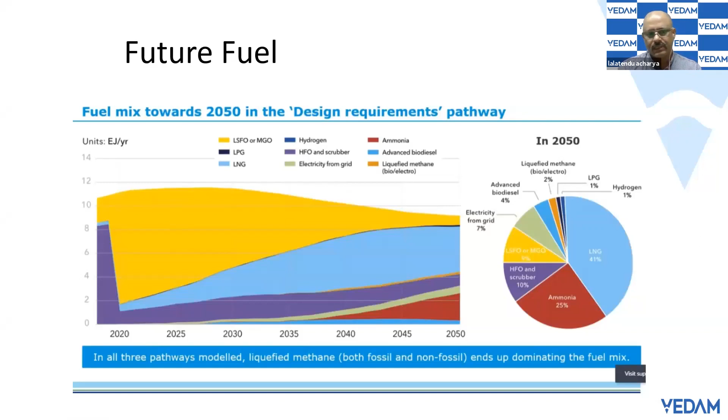So it is natural that, marine transport being a major contributor of air pollutants, LNG is going to come in a big way as a low carbon fuel in future, till we find a completely zero carbon fuel at some point in future. So for the immediate and medium term future, LNG will be considered as a marine fuel for days to come.

So now coming back to why we have considered LNG for coastal ships. Coastal vessels have a very typical requirement. It is almost like a liner service, and most of the cargo owners are ship owners. And going forward on the Indian coast, in the next 3 to 7 years, there's a good possibility that bunkering and supply chain for LNG is going to come in a big way. So taking all those things and the environmental and pollution aspects into consideration, we foresee a possibility of a lot of activity towards LNG fueled vessels, or rather dual fuel vessels, on the Indian coast.

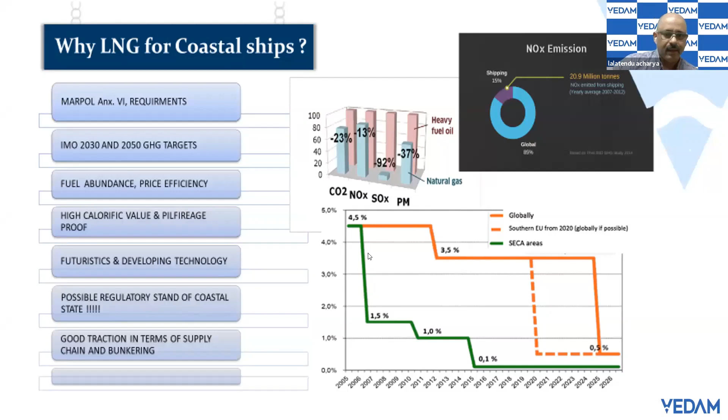Now going to the next slide, we discuss what the challenges are. We have divided the challenges into 4 categories. The first is design and structure related. The second is fuel and combustion related. The third is environmental safety, and the fourth is cost related.

Now discussing design and structure: it being a cryogenic fluid, considering a coastal vessel, it will be stored in a type C tank. So the tank location, the storage volume, and the supporting structure play a big role. Why storage volume? Because with coastal vessels we are talking of short voyages and the possibility of a frequent bunkering facility available.

So in that case, storage volume plays a big role, because the ratio of a conventional HFO storage space for a particular engine size to an equivalent LNG fueled engine is around 1:3, which means in the case of LNG, you will be losing almost 200% more in terms of volume. Now, the size of the tank plays a big role here. So through our iteration process and design, we understand how we can minimize the storage volume.

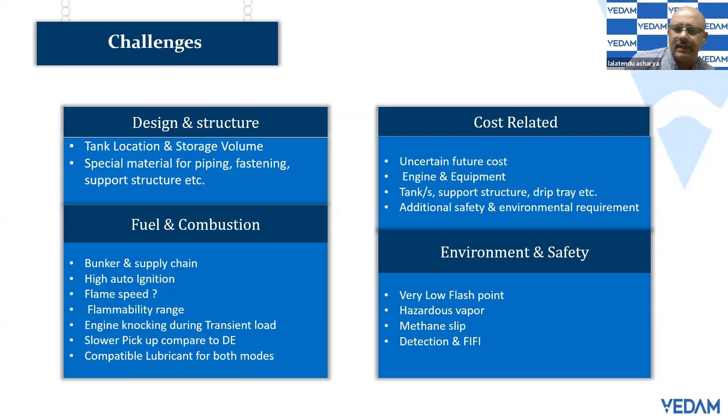Then I discuss about environmental and safety. Yes, this particular LNG fuel has a very low flash point, so handling the hydrocarbon vapor is a big challenge. So the hazardous area, the hazardous concept, or the hazardous vapor presence poses a big challenge as far as fire safety is concerned.

Then we have an issue called methane slip, and here we are discussing 4-stroke dual fuel engines in this particular presentation. So when low pressure methane or natural gas is admitted inside the combustion chamber of the engine, there's a possibility at low load or low speed that part of this gas doesn't achieve the required combustion level. So that gas slips through the exhaust lines into the atmosphere, which is normally called methane slip.

And methane being a GHG gas, that is still a big concern. And many of the engine builders and equipment suppliers are working on this particular aspect to improve and minimize the possibility of methane slip. Then, of course, we come back to fire detection and firefighting, which require extra care because of this presence of hazardous vapor. Now, all these additional safety and additional structural requirements will have a cost implication.

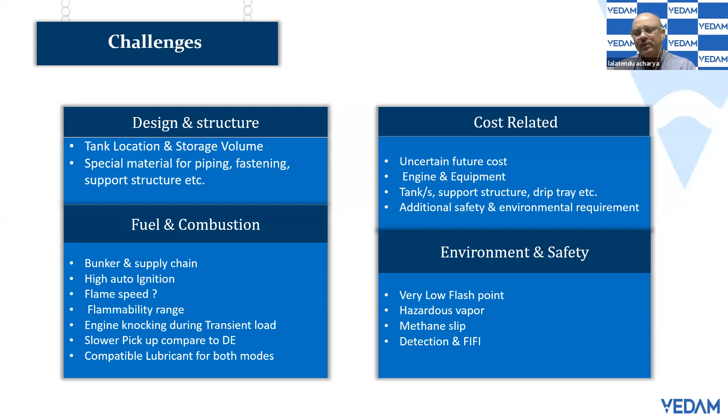And as far as the fuel cost is concerned, yes, it is a dynamic situation right now. We are not very sure about the fuel cost after 2, 3, 4 years, both in terms of LNG fuel cost as well as normal conventional fossil fuel of IFO, HFO, LSHFO, and diesel oil, MGO or MDO. Similarly, engine and equipment. At this point of time there is a cost factor available, but what happens after 3 years, 5 years? What is the demand and supply? What will be the cost? Those things have to be taken into consideration.

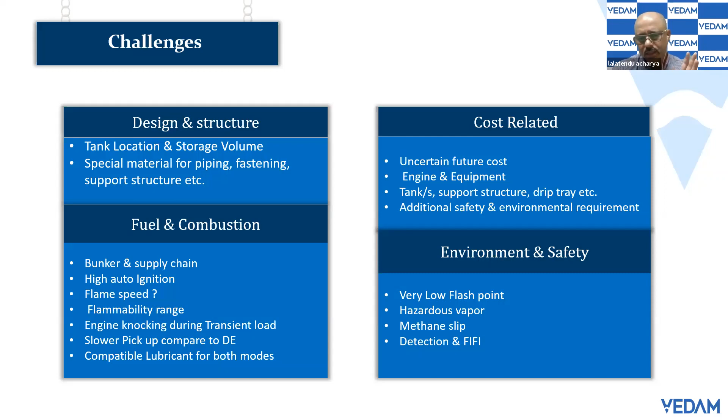We require special material for tank support, structure, piping, ducting, insulation, drip tray, which is costly material. So this will pose additional cost as far as the design and construction of these vessels are concerned. Then, of course, additional safety and environmental requirements.

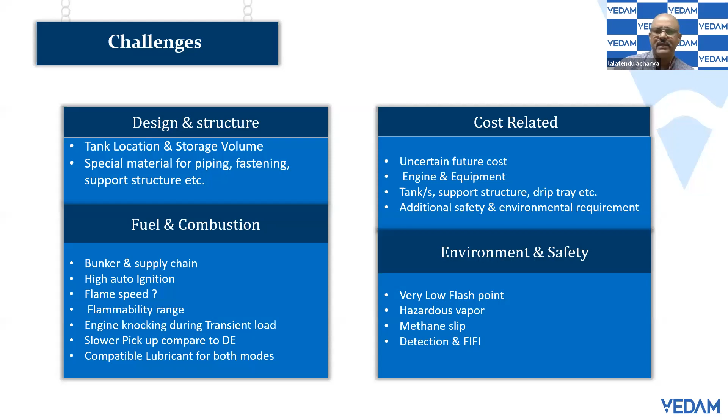So this is a slide where we are discussing the IGF code, which basically deals with low flash point gas fuel. The complete functional requirements of all the appliances and their arrangements have been discussed in this IGF code, and the IGF code has come into force since 1st January 2017. As you could see, chapter 1 to chapter 15 talks about various aspects of the equipment, structure, installation arrangement.

Then part A2 talks about ethyl and methyl alcohol, which is not of our concern as far as this particular presentation is concerned. Then part B and part C talk about manufacturing, workmanship, testing, and part C, also chapter 17, talks about operational requirements and training. The interesting part of this particular code is we can consider it a new age regulation, which is basically based on risk assessment and is goal based.

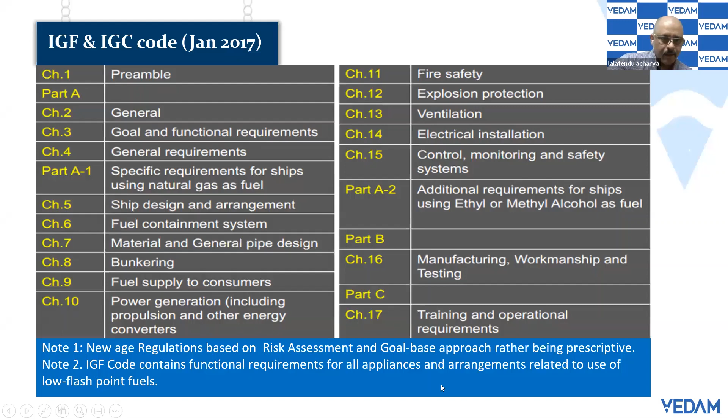And coincidentally, our design for a coastal vessel also involves a goal-based approach, a risk assessment and risk mitigation methodology. So the next slide will be discussing those aspects. As you could see, the biggest challenge for an LNG fueled vessel over a conventional IFO or MDO fueled vessel is the storage space, the tank volume, the handling of cryogenic and hazardous fluid, additional ventilation, safety, firefighting requirements, and the location and the loss of cargo volume because of these LNG tanks.

Now, the reference vessel we have taken into consideration while discussing these LNG-fuelled coastal vessels could be a bulk carrier, tanker, or even a RoPax vessel. The DWT is between around 8,000 to 10,000 tons. Length could be anywhere between 105 or 110 meters to 125 meters.

Why are we limited to 125 meters? This is based on our knowledge of jetty size, the dry docking facilities available, and of course the principal dimensions like draft and beam. Speed, we have taken as 9 to 10 knots for our reference, for our discussion.

Not more than that. Why? Because, knowing it very well, operating a coastal vessel beyond that speed with so much fishing traffic and coastal traffic is not a feasible option. But yes, while discussing a RoPax vessel, we can consider a speed of 14 to 15 knots.

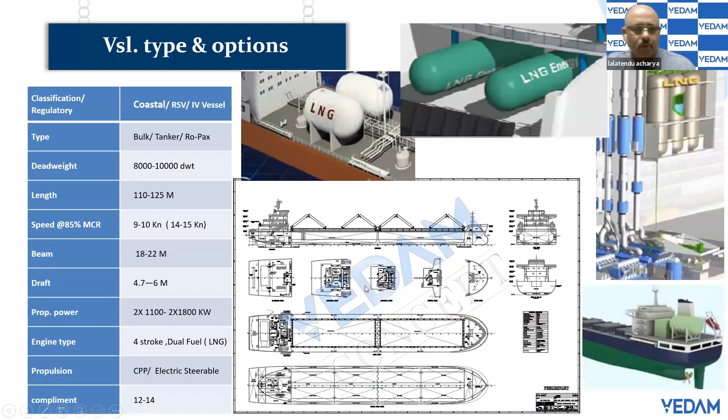Now, in the next slide, we are discussing the vessel type and the options. Now we come back to what engine and propulsion system we can have. We have not considered the fixed pitch propeller arrangement for this size of vessel. Why? Because LNG engines are inherently slower to respond, and the acceleration of the engine is relatively slow compared to a diesel engine. So a conventional FPP would pose certain operational difficulties.

That is why, after discussion with certain engine builders and taking into consideration certain designs operating in various parts of the world, we have shortlisted that a CPP arrangement will be better for a coastal vessel of this size. And why twin screw? Twin screw gives us a certain redundancy. Even if there is a problem with the gas supply system of one engine, we can still operate the second engine. And CPP also gives us the advantage of a smaller propeller, which in turn helps us operate the vessel in low UKC, lower under-keel clearance areas.

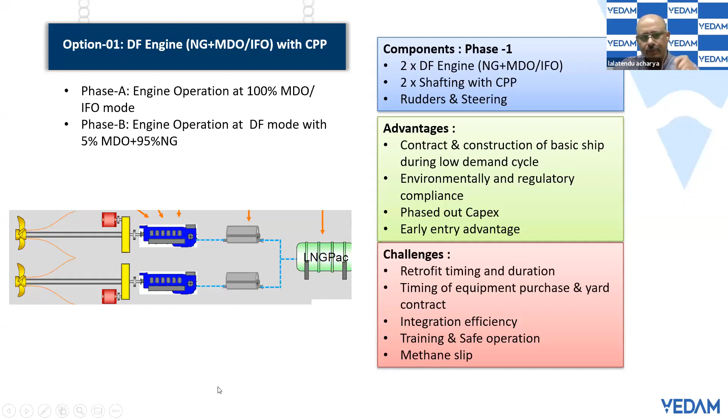So this is our proposal for option 1. Then we go to option 2. So what happens in phase 1? The DF, the dual fuel engine, the shafting system, the CPP and associated system, the IFO tanks or HFO tanks, and the tank heating, tank purification system

is designed, installed, and we leave out space for the LNG plant and the LNG system, and the vessel operates in the normal way till we reach a suitable time where the second phase can be installed, or the LNG pack or the LNG supply system can be installed on board. So that can be any time after 2 years, 3 years, 5 years, depending upon the commercial requirement or the availability of the gas.

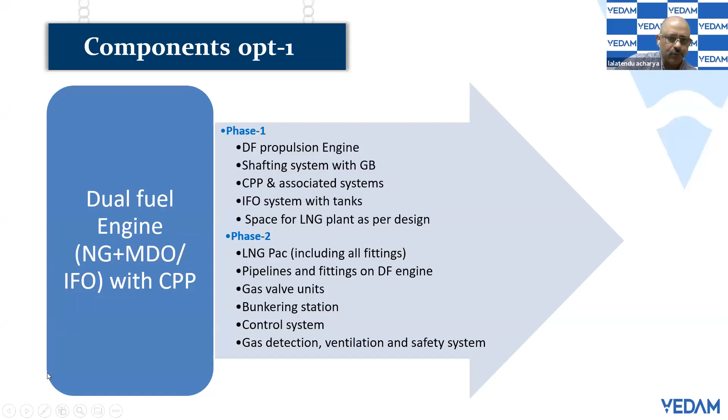So in the second phase, we put the LNG pack, the entire LNG pack system, the pipelines and fittings of the DF engine, gas valve, which constitutes the gas valve unit, bunkering station, control system, gas detection, ventilation, and safety firefighting system, which can be installed at the second phase. Similarly, for option 2, we have gone for a steerable, electrical steerable or azimuth propulsion system. This also can be replaced with a mechanical steerable propeller.

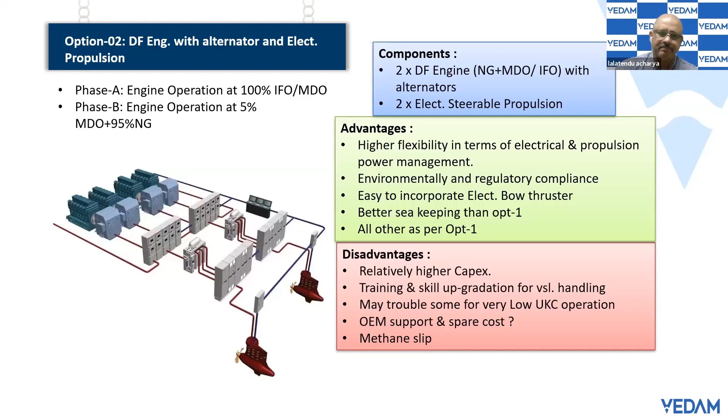Similarly, here also we go by phase 1, where the DF engine along with the alternator, switchboards, cabling, everything will be done. And in the second phase, the LNG pack, the pipelines, fitting, gas valve unit, bunkering system, control system, gas detection, ventilation, safety, and firefighting system can be installed. So the idea of suggesting this two-phase installation is to distribute the capex over a reasonable period, let's say 3 years or 5 years, depending upon the owner's financial plan or financial goal.

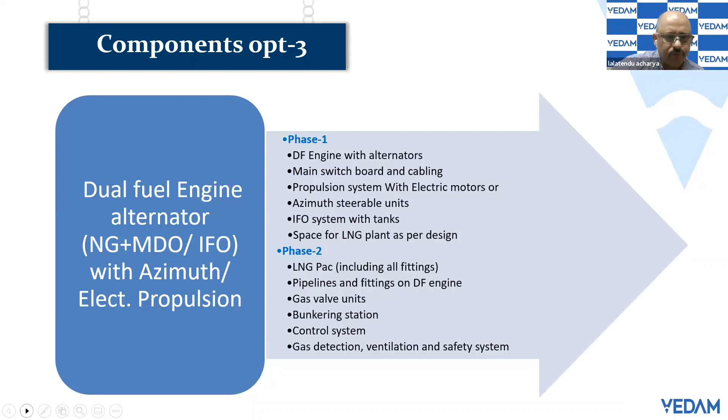And also, we feel that designing an LNG dual fuel engine vessel at this stage takes a lot of time. It could be anywhere between 12 to 16 months, since the bunkering system, the cargo system, the combustion, the engine, the technology, the equipment, everything is still further developing. And we need a lot of iteration to reach the optimum design. The process has to start very early. A period of 12 to 14 months or 16 months will probably be reasonable to design the concept or the basic design of an LNG fuel vessel.

Though the fuel supply system is not available right now in India, we are sure that while we carry out this concept design and basic design, and while the vessel is being contracted and built, by 2, 3, 4 years, the supply chain will be very much available in India. So now coming to the next slide of LNG equipment, these are certain typical LNG equipment.

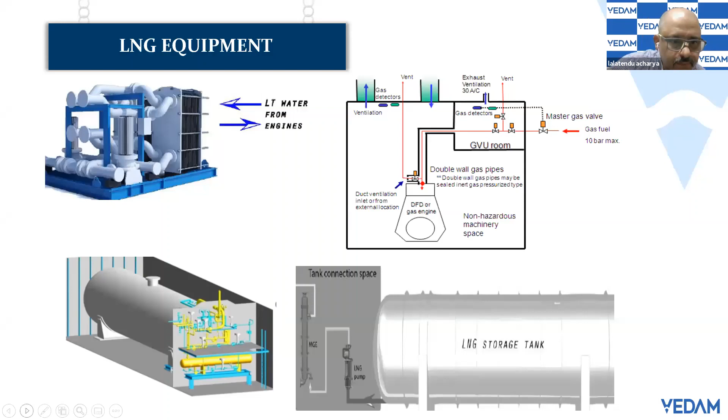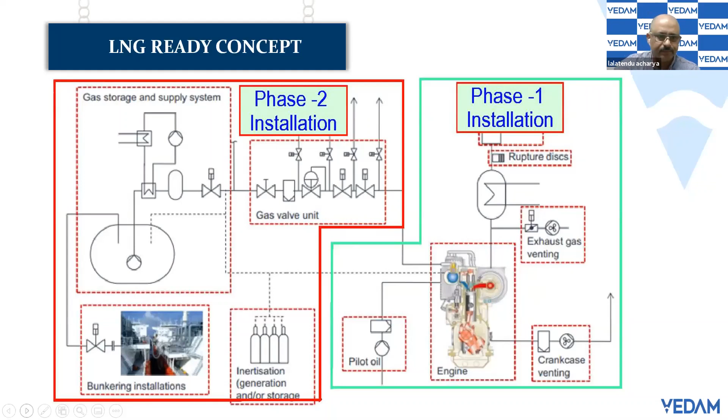And on the right hand side, which is almost like a conventional vessel, except the LNG space, which we have to design and leave out, it shows the engine, the exhaust gas venting system, the crankcase, and the pilot. The only difference is that it is a DF engine instead of a conventional IFO or diesel engine. Then we come to the strategy for this. In fact, there have already been many coastal vessels in Europe, including ferries, tugs, and smaller container vessels, already operating and converted to dual fuel engines.

We suggest here, as I said, the basic and concept design can take anywhere between 12 to 14 months because it involves rationalization of all commercial requirements, design requirements, availability of engine, yard, equipment, expertise, and integration of each and every component of the dual fuel engine and LNG supply system. So the strategy for this can be in 2 stages.

The first stage is what we call the concept level, where a concept of the dual fuel vessel is prepared, taking into account all the commercial and business requirements, the commercial goals, the business goals, the cargo it's going to transport, the cargo handling system, the draft, the jetty size; all those things have to be integrated very closely. And then we decide about the bunkering, tank capacity, engine power.

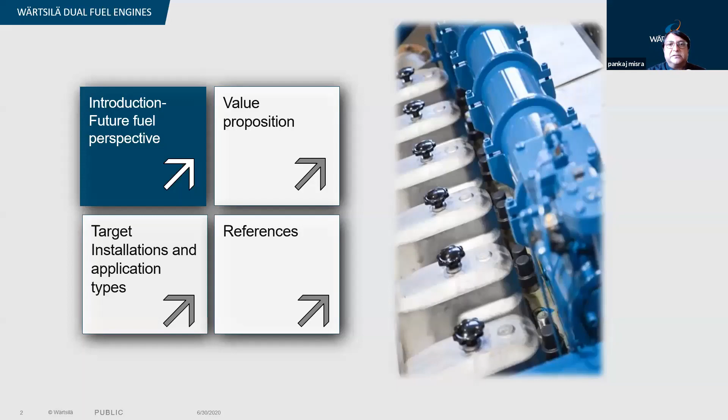As highlighted by Mr. Acharya today, the shipping industry is facing the biggest challenge of decarbonization. The ambition level set by IMO for 2030 and 2050 are quite challenging. This becomes more critical as ships being built today will be part of the fleet in 2030 and beyond, and thus will be part of the fleet emission calculations.

There are business risks that must be considered while we are looking forward to future fuels. First is the availability of the fuel. This will be restricted due to local regulations, feedstock, production capacities, and existing infrastructure. There will be increased capex and opex because the carbon neutral fuels would require existing equipment to be replaced, and are likely to be more expensive than fossil fuels, at least initially. There will be additional cost for storage, which will be added to the capex.

Then there will be an impact on vessel structures, as many of the carbon neutral fuels will have lower volumetric energy density compared to HFO and LNG, and this will require larger tanks to maintain the same vessel endurance. This will also pose increased complexity when we talk about handling cryogenic or toxic fuels, which will require more complex solutions to comply with rules and regulations. And then the last one: there will be a mismatch between the number of shipyards capable of handling the fuel conversion work and the size of the international commercial fleet.

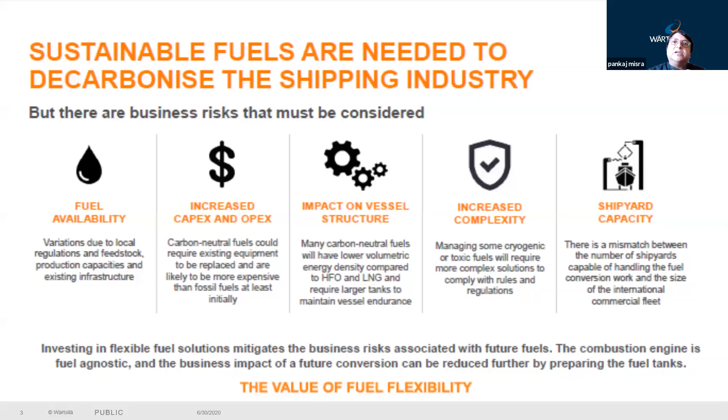Now here I have taken the diesel engine running on the diesel cycle and a dual fuel engine which is running on the Otto cycle and diesel cycle as well. This slide basically demonstrates how flexibility can be realized while considering some of the future fuels. If we talk about the diesel cycle, the biodiesel fuels in the future can seamlessly run on the diesel cycle - there will be no problem.

When we talk about ammonia and methanol, then we do need to do the retrofit of the engines - at least the top half of the engine has to be changed. Then coming down to the dual fuel engines on the Otto cycle.

The DF engine on the diesel cycle will have all the capability to run on biodiesel, ammonia, methanol. And besides this, on the Otto cycle, it can burn bio-LNG, synthetic LNG, as these are simply methane in terms of bunkering and engine operations. So this can be handled very well with the dual fuel engines on the Otto cycle. Starting on the dual fuel engine cycle will mitigate the risk for retrofitting.

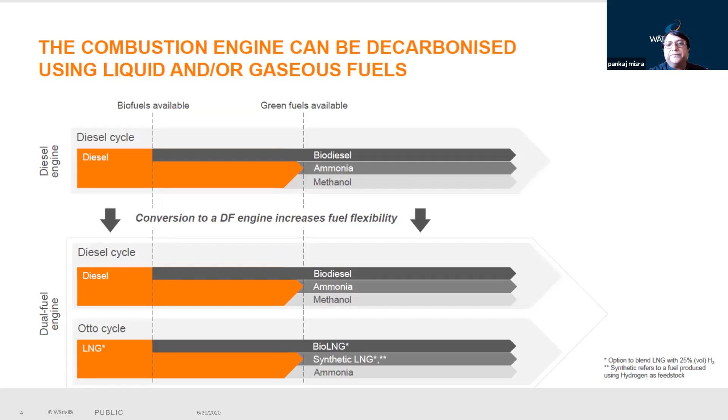Going forward on the Wärtsilä dual fuel engine portfolio, the portfolio has engines from 0.5 megawatt up to 18.3 megawatt power, and these are basically placed presently across all the marine segments these engines are operating.

The Wärtsilä DF engine portfolio is compliant with IMO Tier 3 regulation in gas mode. This technology has been successfully tested and demonstrated with mixing hydrogen into LNG to further reduce the emission, with potential to meet the 2030 IMO requirements.

The DF technology with Wärtsilä has already been successfully applied in marine application using a mixture of LVOC, that is liquid volatile organic compound, and LNG as a fuel to reduce the emissions. The Wärtsilä DF technology is also in use running on ethane as a fuel in marine applications today.

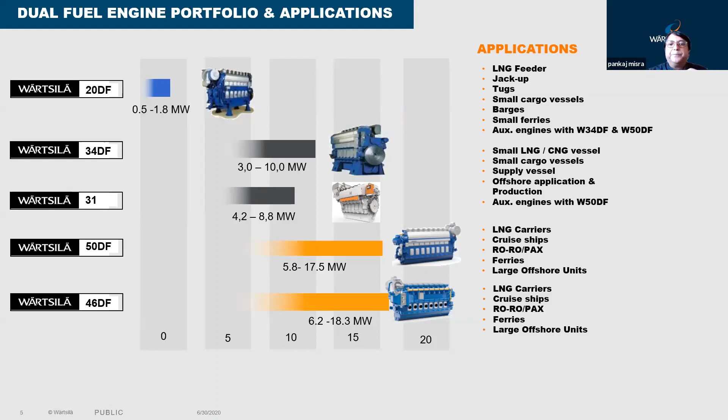Going forward, these dual fuel engines have been introduced with precise combustion control by firing pressure monitoring, variable valve timings, and automatic combustion parameter control.

The DF engines have automatic crankcase ventilation gas, methane content control on IGC ships with the mandatory crankcase gas monitoring systems. These are enabled with lower fuel methane number with reduced knock sensitivity up to 70 methane number.

This answers one of the questions which Mr. Acharya has prompted, how these engines are basically equipped to bring down the knocking. As I said, this is done through precise combustion control with variable valve timing and automatic combustion parameter control. We monitor the firing pressures, and accordingly the system tunes to operate at the next level.

Mr. Acharya has presented some of the power requirements in the coastal vessel requirement, and the Wärtsilä 20 DF fits perfectly fine as far as the powers are concerned. I would like to touch upon this particular engine. This can be operated on natural gas, LNG, ethane gas, MDF, biofuel, and HFO.

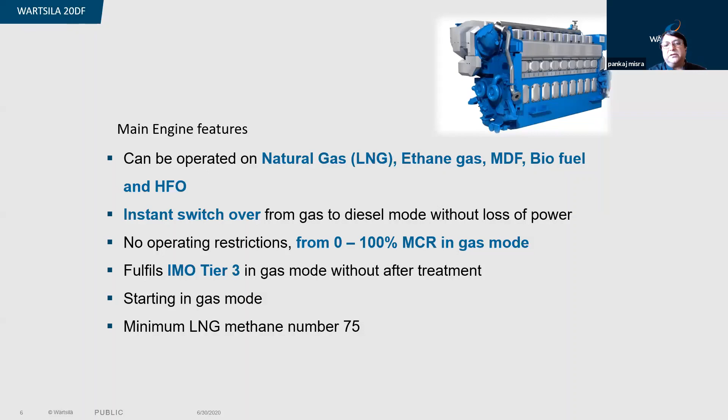Presently, the minimum LNG methane number is 75, and there is a development for the C-type 20 DF engine where the methane number has been successfully tested down to 70.

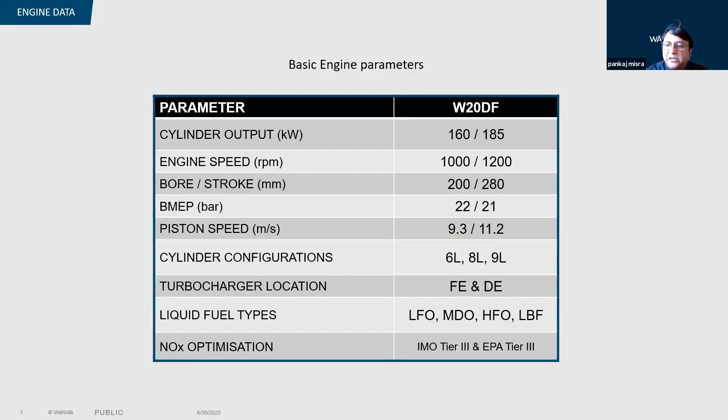Some of the parameters with regards to the cylinder output, brake mean effective pressure, about 22 here, and cylinder configuration with inline engines 6, 8, and 9L. The turbocharger location is flexible. The liquid types, as I said, can presently be liquid biofuels, HFO, MDO, LFO, with NOx optimization for IMO Tier 3 in gas mode and EPA Tier 3.

When we talk about the value proposition of this particular engine, this is best in its class, the most compact and lightweighted dual fuel engine with highest power to weight ratio. It facilitates the smallest engine room.

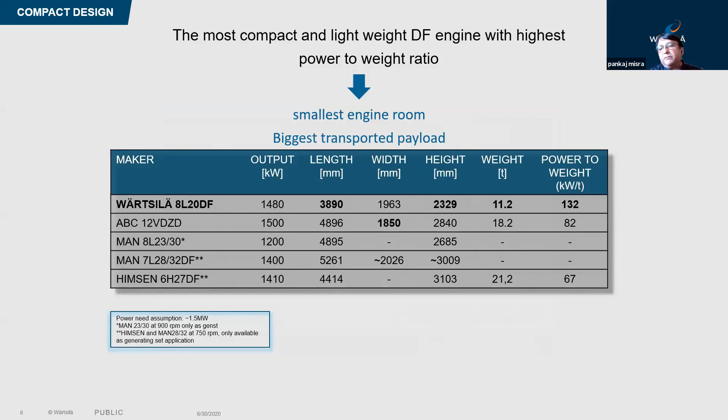It gives you more maintenance space and eventually turns into the biggest transported payload if we compare within the same family of engines available from other vendors.

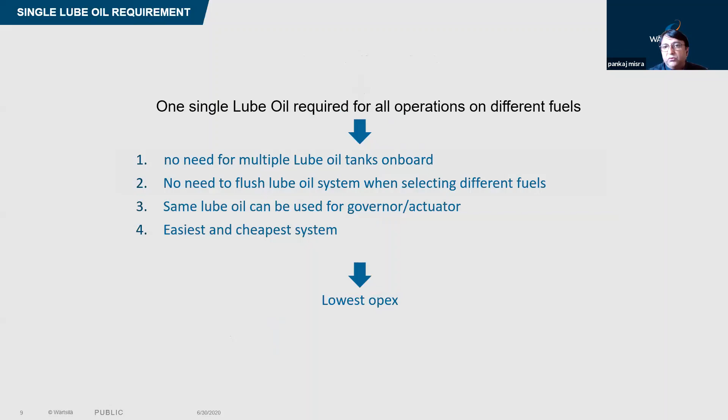The engine has a single lube oil requirement, basically for all operations with different fuels, which turns out to be a lower operating cost for the ship owners and operators.

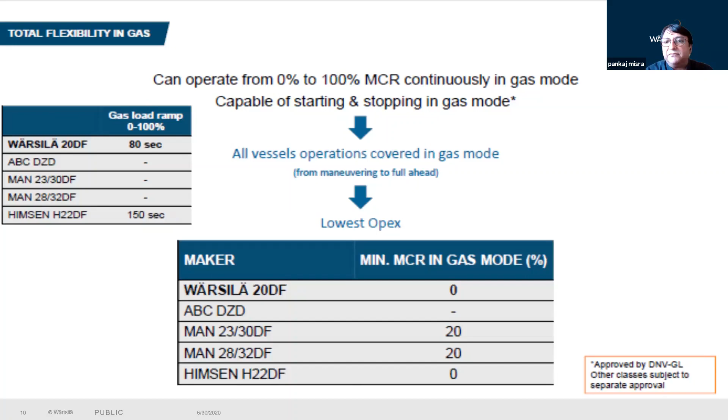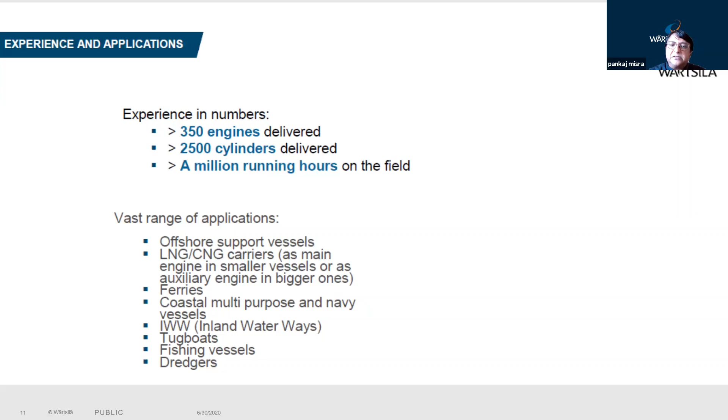When we talk about the experience and applications here, more than 350 engines of this particular model have been delivered, with over 2,500 cylinders and about 1 million running hours in the field. There is a vast range of applications ranging from offshore support vessels to LNG, CNG carriers, to ferries, to coastal multi-purpose vessels, and inland waterways, tugboats, fishing vessels, and dredgers.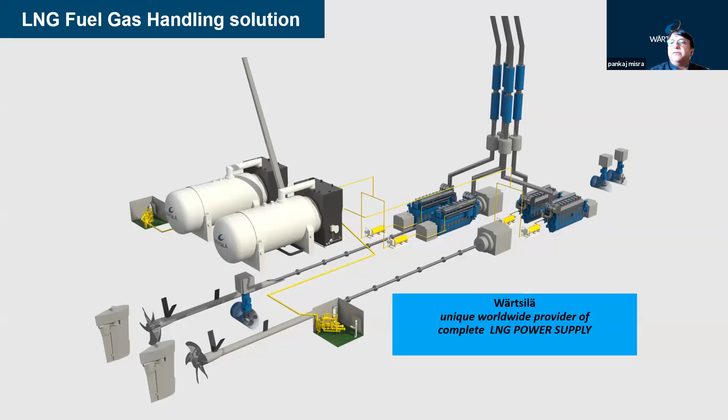Wärtsilä has the unique offering of providing the complete fuel gas supply system, the complete LNG power supply. And as Mr. Acharya has mentioned, these C-type tanks can be placed on deck, either single wall or double wall. But if these have to be provided below deck, then it has to be a double wall, considering maintenance requirement, ventilation requirement, and fulfilling the classification regulations.

This is a simple P&ID diagram showing how the complete fuel gas supply system works in conjunction with the dual fuel engines. What Wärtsilä can cater here is complete designing and supply of bunkering stations, LNG C-type tank, the complete evaporators, the pressure buildup evaporator, the main gas supply evaporator, all the instruments and valves, the glycol water mixture heat exchangers, and the complete gas valve unit.

These gas valve units can, on specific requirements, also be integrated with the tank room. And in some requirements where there is a need of engine operation during bunkering, small changes can be catered to fulfill these needs.

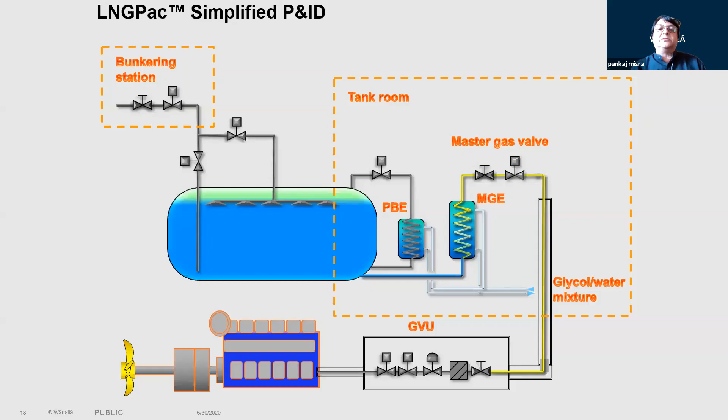As Mr. Acharya has presented the diesel electric operations as a second option, I will complement that this diesel electric configuration can also be supported by a hybrid energy management system. In hybrid energy management system, we have a hub controlling energy flow from various energy sources. The configuration of the hybrid system depends on what kind of operational profile we have on the vessel, and integrating the energy storage, like the energy coming from battery.

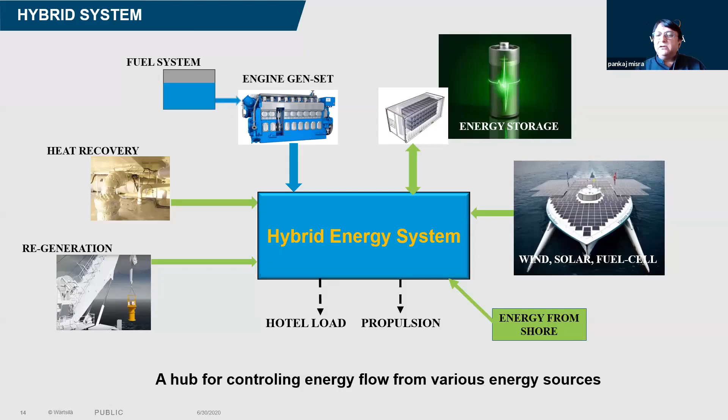It can facilitate some vessel operations when the vessel is running on idling, or running on very low load. So what this turns out to be is that the engine is always running on the optimum load, which gives the best SFOC and reduced number of engine running hours, which reduces the operational cost and the installed power of the vessel.

So we have about 334 references from diesel, electric, and hybrid energy systems. This is one of the markets which is growing quite fast now, mainly in Europe and Asia.

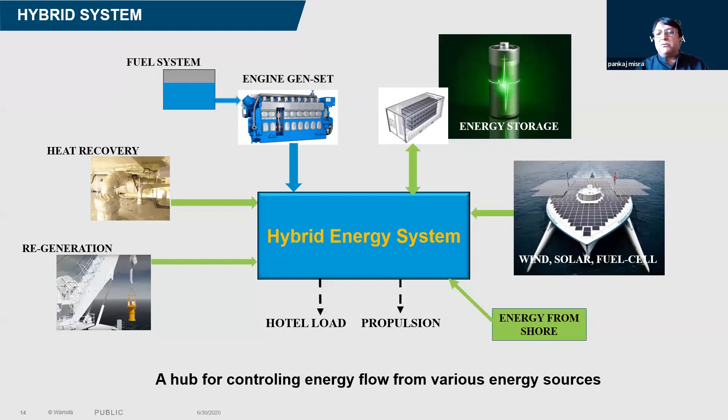Wärtsilä can support complete life cycle solutions, which enhance the asset performance, extend support to marine operators in more precise business planning, performance optimization, and flexible maintenance. These life cycle solutions are based on gathering and processing of data, advanced analytics by our experts, continuous performance improvement, and this can be offered according to the need as required by the operator.

Like we can have optimized maintenance, where based on a dynamic maintenance plan schedule, the timelines between overhauls can be extended. This takes class on board, it's class approved, that we extend the time between overhauls by monitoring the data.

Then when we talk about optimized operation, this is one level up, where we talk about the efficiency of the complete system, and we see in real-time monitoring and advisory systems how we can improve energy efficiency.

Thirdly, where the requirements of operations are very stringent, we can guarantee the operational reliability and uptime of the systems, and this puts the operators and owners at peace of mind, saving operational costs through improved and maintained ship efficiency.

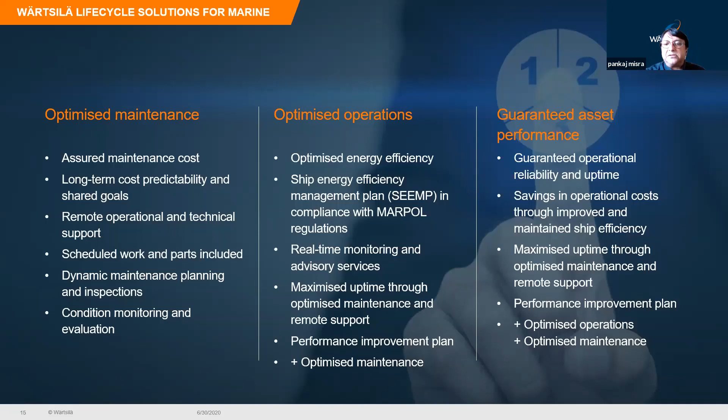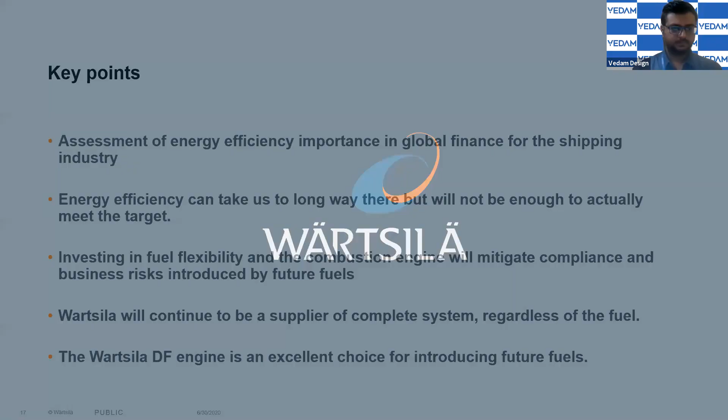Just to highlight some key points, the assessment of energy efficiency is very important in global finance for the shipping industry, and they really look at design stage how the energy efficiency of the vessel can be linked with financing options. Energy efficiency can take us a long way, but it will not be enough to actually meet the target of IMO 2030 and 2050.

So if an owner or operator has to decide, he has to invest in fuel flexibility so that he will mitigate compliance and business risk introduced by future fuels. Wärtsilä will continue to be the supplier of the complete system regardless of the fuel, and the Wärtsilä DF engine is an excellent choice for introducing future fuels.

As I said, we have tested about 20% hydrogen mixing with the LNG. We have already tried out the engines, and going forward we keep developing this technology further. These are proven engines, and overall the kind of flexibility it gives to meet future IMO requirements is that it provides a solution where these future fuels can be burned with minimal changes with regards to retrofitting or adding to the cargo containment system, the GSS systems, which will be required as per the future fuel.